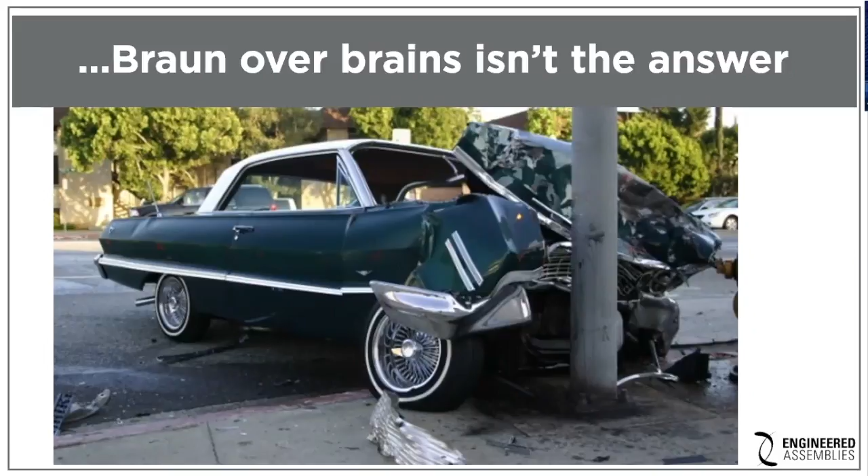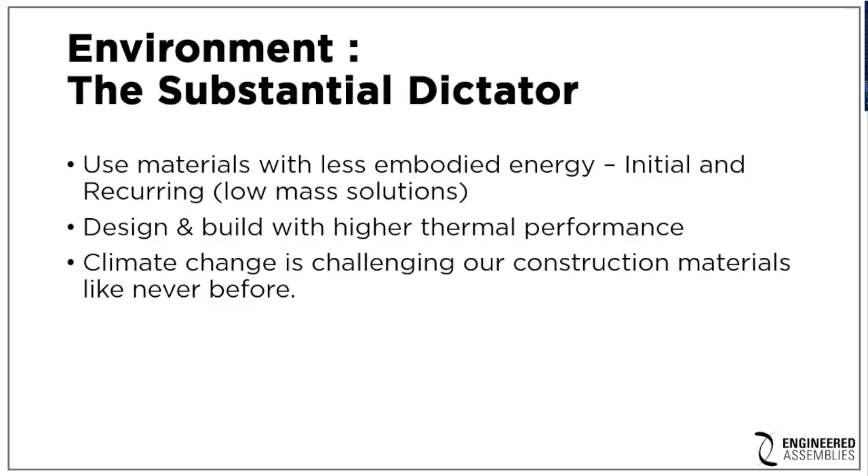Let's get started discussing a little bit about how environment is a substantial dictator. We're in an era, and have been for a while, where we're trying to use materials with less embodied energy—meaning both initial and recurring, which I'll expand on. We're trying to design and build with higher thermal performance. And climate change is challenging our construction materials like never before, which relates to what I mentioned earlier about facades being on the front lines of all the wear and tear of a building.

So embodied energy—initial and recurring. Initial is the embodied energy it takes to fabricate a material and get it on site. Recurring embodied energy is the energy it takes to maintain or replace that material if it fails prematurely. So what we have is a fairly complex issue: we're making materials lighter weight, lower mass, but we need them to last an incredibly long time. We need them to perform properly. And how do we do that?

We need to engineer the way they go on buildings better. We need to design the way they go on buildings better. And that's part of these 5 most common mistakes—not just the materials we see, the skins so to speak, but also the substructure that holds them. That has to be designed and engineered with an equal amount of thought, because the two work in unison. It's a holistic system.

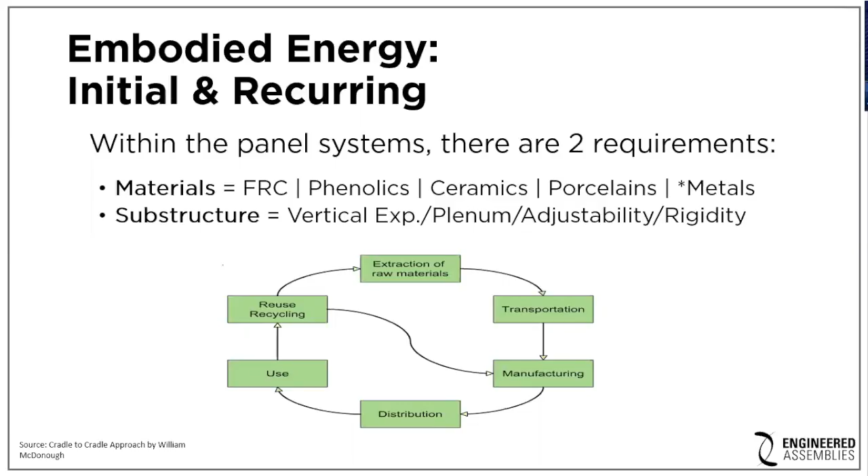The lower mass issue is going to come up again, but ultimately these materials, which are better for the environment and can be engineered properly, don't hold us back from a design standpoint. In terms of function and form—from a form standpoint, we can address historical content, we can build contemporary structures, designed in a way that follows the trends of today's design. There are no limitations there with these materials. That goes for phenolic panels, high density fiber cement, porcelain, ceramics, some particular metals. But today's 5 that we're going to be talking about is a real issue.

Now, let's be clear: the House of Design and the field of Construction have equal shares in the responsibility towards this subject.

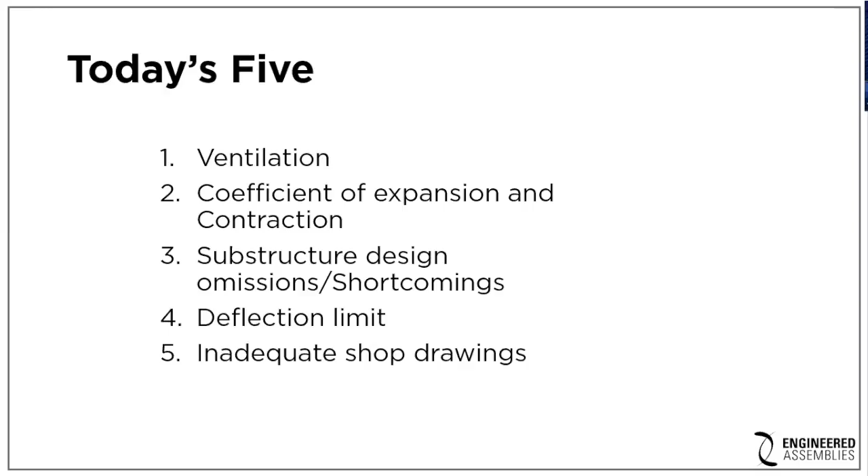Just as Engineered Assemblies has an obligation to provide clear direction towards bettering the success of these lightweight, high performance RVRS facades, we're going to examine some key areas and show the importance of how quality is potentially compromised. We'll look at ventilation, coefficient of expansion contraction, substructure design, omissions and shortcomings, deflection limit, and inadequate shop drawings, which are a good place to start discussing the 5 common mistakes.

So to begin, RVRS, what is this that we keep referring to? Well, RVRS is just an acronym that Engineered Assemblies created years ago, which simply meant rear ventilated rain screen. Now, there's probably as many definitions for rain screen as there are definitions for free range chicken, okay?

But with that in mind, when we look at this particular design, this is a design that was originally crafted and explained through DIN standard 18516. So Engineered Assemblies didn't invent this. This is something which was tried and true, proven, and works very well today. And there's nothing magic about this.

As a good rain screen system, there's a front door and a back door, okay? We're going to manage moisture with this type of system. One of the key areas, looking at the first topic of our discussion, ventilation, is having this 1-inch cavity, uninterrupted ventilation, this active plenum.

We can see in this design here that we've got a skin on the outside in red. Then we've got a vertical girt system, 25 millimeters deep, or 1 inch. That's an uninterrupted active plenum. We're going to allow ventilation to run through that. It's certainly an adequate enough chamber to allow moisture to drain through the power of gravity, but more specifically, we're going to have moisture in this system, and we need to manage that more specifically with ventilation.

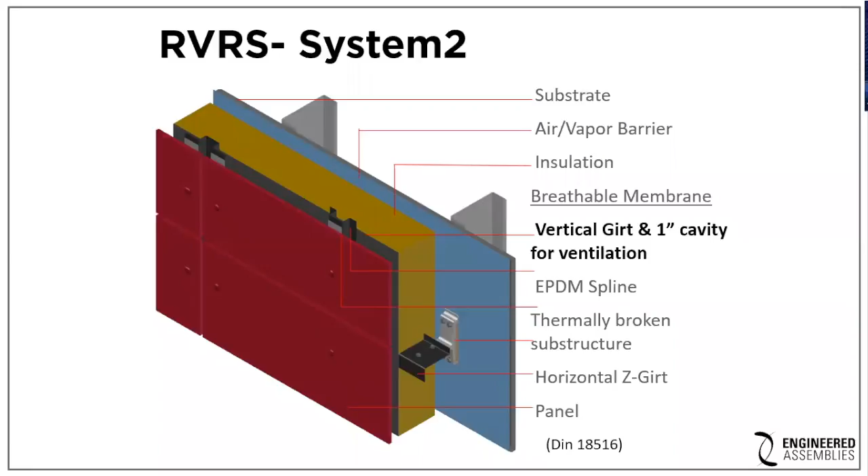It can withstand a head of water, and it's also going to give us a very clear face on the inside of that plenum, because on the outside of that plenum, meaning the skin side, we've got the back side of our facade skin. So we've got two nice smooth surfaces for air to circulate upwards, and air does move upwards. I don't believe there can be too much ventilation for the purpose of getting rid of moisture. So we need that ventilation through an uninterrupted active plenum to help ventilate.

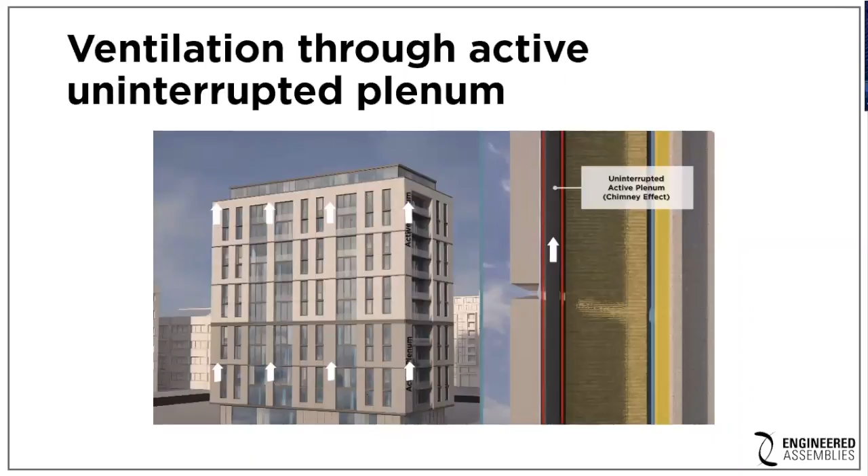And we also, amazingly enough, create a bit of a vacuum, okay? The vacuum's going to pull, as the air is moving upwards, it's going to pull anywhere it can and move moisture, maybe in the form of vapor, out of that cavity.

Now, this is an interesting point that engineering came up with and started speaking to me about this presentation, that this 25 millimeter active plenum is actually a microclimate. They were suggesting that it's not the temperature on the outside of the panel, it's not the temperature on the inside of the insulation. It's its own little climate, okay?

And what it helps to do, besides defer moisture and act as a great ventilation cavity, is it's also something which is going to balance temperature. It's going to act as an exhaust. If we've got a hot summer day and we've got solar heat gain beating down on the panel, that air inside that plenum is going to warm up. Warm air is going to rise at a quicker rate, so that plenum is going to actually speed up, okay?

And we're going to have a speedier plenum, which is going to create a greater vacuum, pulling, and we can pull moisture actually in the form of vapor through that weather membrane. So if there's any moisture within the insulation cavity that we can see here, any moisture in there whatsoever, maybe from condensation, we can actively create a vacuum to start pulling things towards there.

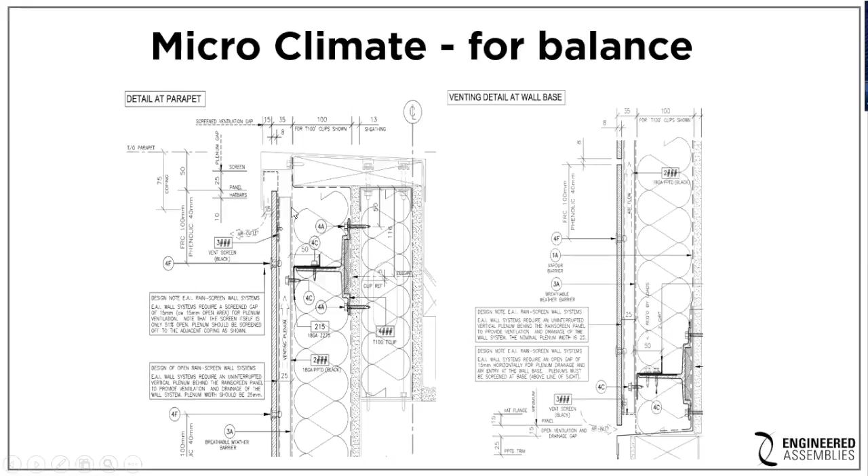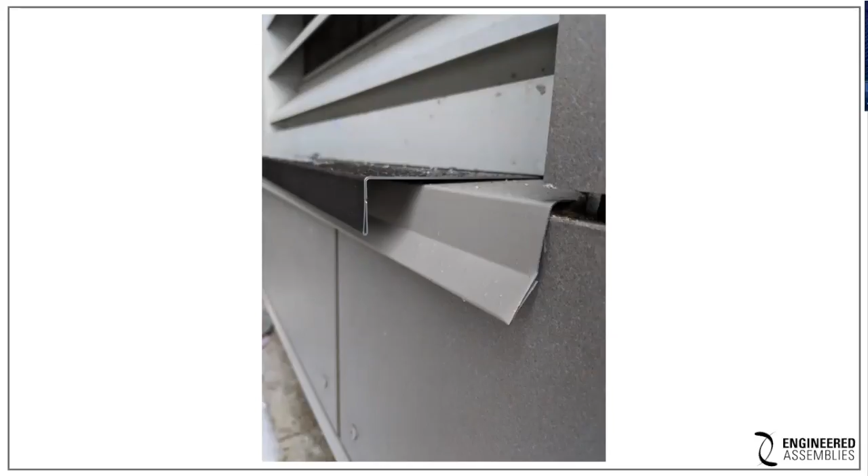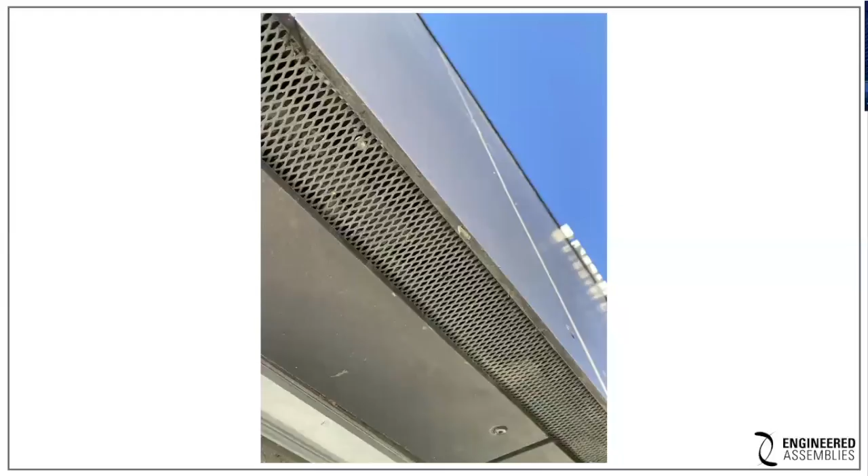As you can imagine looking at this, it's not a matter of expense. No one's saving money by trapping and stopping the plenum. Having an open plenum, and maybe installing a design with a screen like this to prevent our friends like birds or bats from making a house in that plenum, that's a great move.

But we have to ensure that when we're looking at these types of systems, that when insulation goes in - in this particular case, it's spray foam - so...

It's unique, but the same thing could happen with insulation batt that wasn't contained properly. If you had that weather membrane, it would stop the batt from falling forward. But in this particular case, they put the insulation in, and there's been overspray that came forward and blocked off that active plenum. So now we don't have proper ventilation.

When we're looking at phenolic panels or high density fiber cement, we're definitely going to see the results of that, and it's not going to be pretty. Those panels require good ventilation, and it's something they deserve. It's neglectful to either not design this in properly or not take this into consideration when installations are done. So sloppy workmanship, okay?

So that's really the first principle, and it's probably one of the biggest ones. Ventilation is key, and we see these accidents happening on site.

Now, when we get into chapter 2, we start talking about dynamics of facades. We're looking at, exactly as the slide suggests, how panels react with each other and move with respect to their fastening system. Okay, so buildings are live, that's the way we build in North America.

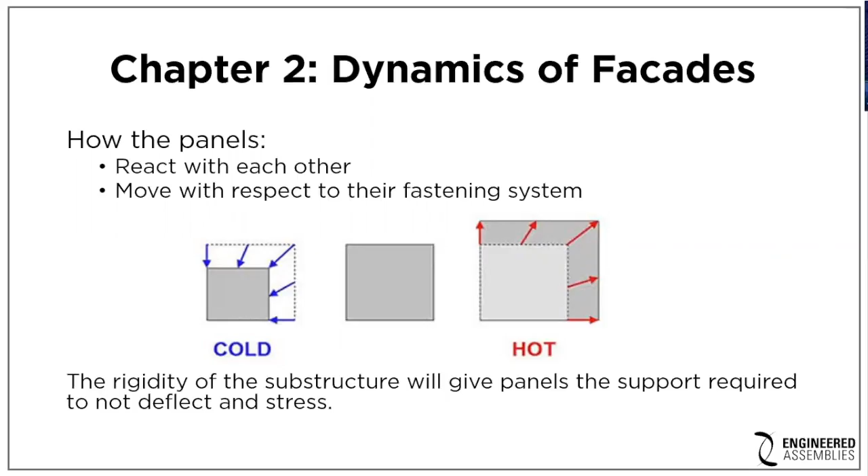Buildings are live, they're dynamic, they move. Floor slabs move. We have steel stud construction with concrete slabs - not everything is a shear wall. So substructures expand and contract, panels expand and contract, and with that in mind we need to ensure these things are being taken into consideration.

So with lightweight materials, low mass materials, they're going to expand and contract more than heavier weight, heavier mass materials, traditionally. That may not be the case for every single material, but by and large that's the rule. So while we're trying to use these lightweight, low mass materials to lower our footprint and do the better thing for the environment, we need to make sure we're addressing the needs of these things.

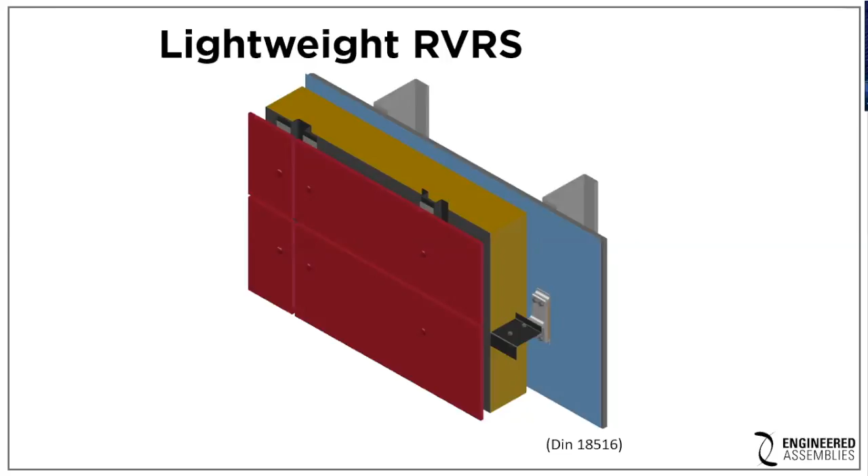Because they can work very well, and they work very well by doing things just like this, by putting in what we call fixed and floating points. So when panels are fastened to a substructure, we make sure there is a fixed point to locate a particular panel, and floating points. This can go for ACM, this can go for a variety of materials that have any coefficient of expansion and contraction. This kind of thing must be respected, and it's not always respected.

Whenever we see failures of panels, and we've gone across the country, and in some cases at the request of even some of our system partners or competitors who've asked us to take a look and see why this is happening, it's usually ventilation or fixed and floating points. It's primarily one of the two.

Panels are not allowed to move. Substructures are not allowed to move properly because our buildings are alive, our materials are alive, or they're not getting enough ventilation. We have extremes of temperature in Canada, and certainly here in Ontario, we see crazy jumps over and above the freeze-thaw line.

That's going to contribute significantly to expansion and contraction, but also the freeze-thaw line presents unique challenges for materials. If there's moisture absorption and then freezing, things can expand when frozen if they've absorbed moisture, so we need to consider that.

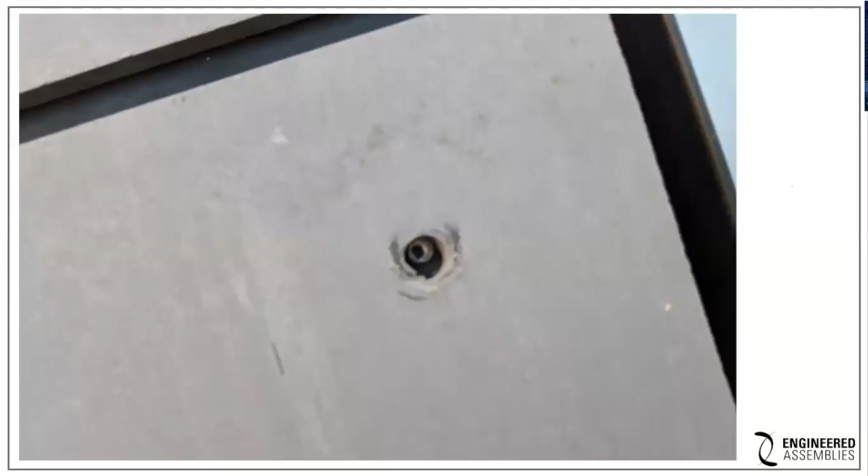So when we look at a picture like this, we see a fastener in an over-drilled hole, which we should be doing. We put in oversized holes with rivets or fasteners for our floating points, so there's float between the fastener and the panel, and the panel can move around.

Some panels have a coefficient of expansion and contraction as much as 1 millimeter per meter. And we're talking about 4 meter long panels, so 4 millimeters - things can move, okay?

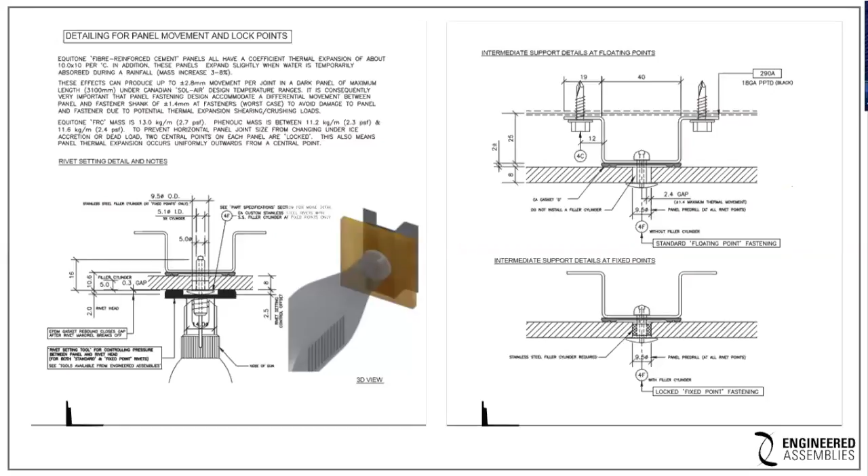We need to ensure that fasteners are being put in the center of holes, not on the edge of a hole, because this is a classic case that I saw at a project recently where they complained about panels cracking, where fasteners were not centered.

So when this panel, when the substructure starts heading north, or the panel starts contracting, what's it going to do? It's going to provide strain right at that point, and that is where it's going to crack. We see this in some cases where people neglect to put in their fixed and floating points on panels, and we see panel failure.

In phenolic core panels, we might not see cracking, but we can see buckling, and it's just not necessary if we just follow the simple rules. Within the Engineered Assemblies Design Guide, we present this very clearly, so it's a very simple system to follow.

Now, using rivets as opposed to thread fasteners is traditionally a more successful route, specifically because with threaded fasteners, there's the issue of fastener tension, and that is going to be regulated by and large by the person installing it. So that becomes a very subjective point.

Whereas when you're using a rivet system, especially by the model that we show within our design guide, all the fasteners, all the rivets get installed at the same tension, uniform. They're not over-compressing the panel, not creating additional fixed points.

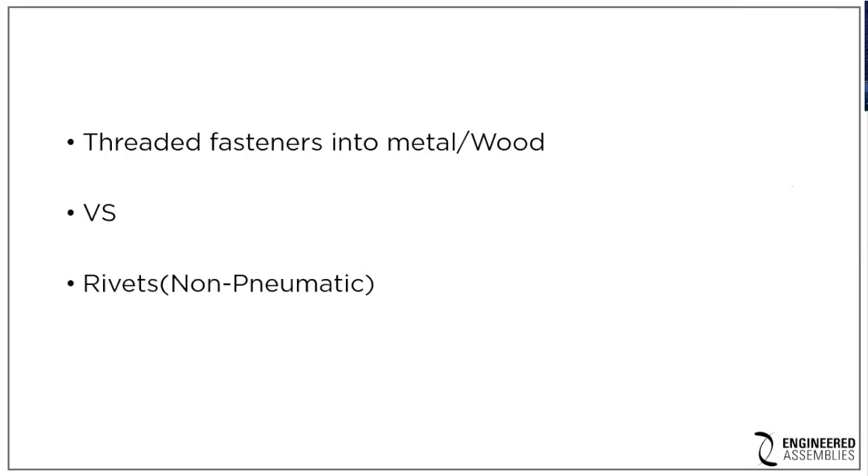And they're all centered within their holes. So if it's meant to be a floating point, it's going to stay a floating point because we're not using a self-drilling threaded fastener going in on an angle or hugging the outside edge of a hole, just like we see here. So fixed and floating points, coefficient of expansion contraction.

Recognizing this is a key point in the success of facades. And again, this is not something that adds cost to a project, but doing this properly is going to allow facade skins to do the job they're supposed to do and last as long as they're supposed to last, not intruding on their secondary embodied energy responsibility.

So in a panel like this, we would have maybe 2 fixed points on this size of a panel. It could be 1 fixed point when it comes to phenolics, and all the rest are floaters. So that substructure can move a little bit, expand and contract, because we typically use galvanized steel systems. Some are aluminum, but our panels are allowed to expand and contract as well.

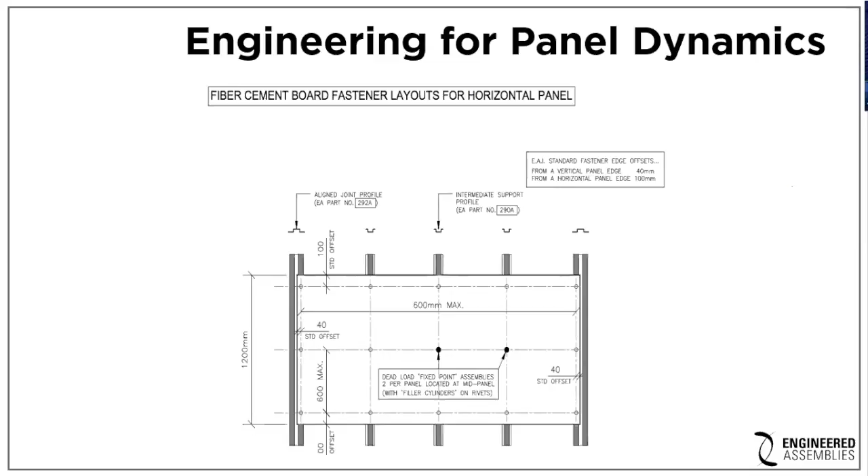If we follow this rule, then we can create very sophisticated designs like this, and they last decades and decades and decades, 50, 60 years. In some cases with some of these materials, could be 100 years. But we can do the edgy design that we want to do and know that from a functional standpoint, the function's going to stand behind the form, and be successful.

So leaping into substructure design, this is a critical point because this sits hand in hand with panels and the coefficient of expansion contraction. Substructures are equally as important - the design of them and the implementation of them in terms of installation. When we're looking at that, we need to respect traditional points of deflection and movement on a superstructure.

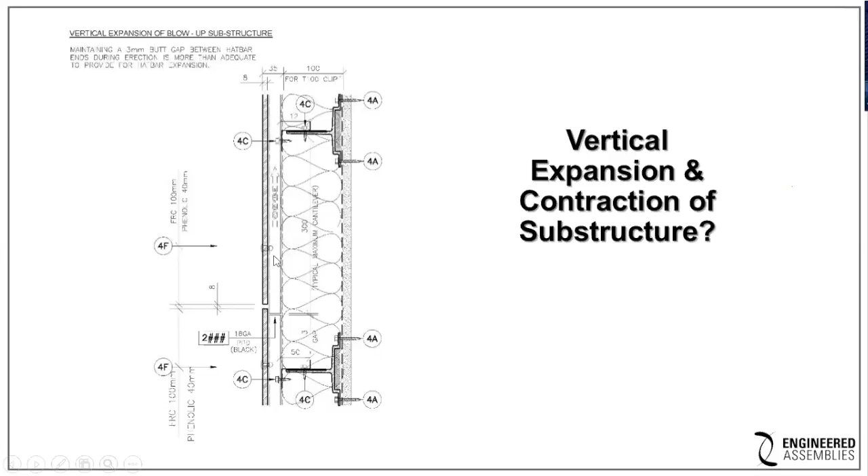If we're looking at the RVRS design or a vertical member supporting a panel, we obviously have to respect slab edges because slab edges deflect. So when we have a slab edge deflecting, that means we have to start and stop every vertical member, so our substructure for our system has to start and stop.

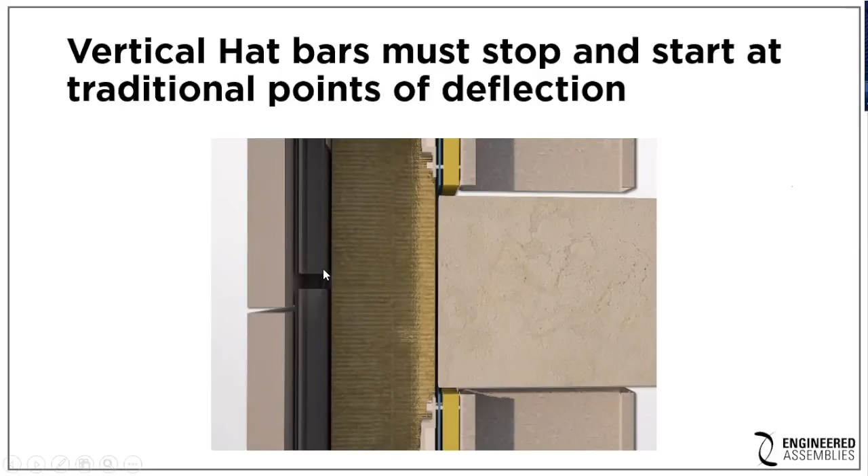Now, I've been doing this for a while, and these are typically not elements included within architectural drawings. In some cases they are, but typically not. These are elements included in things like the Engineered Assemblies Design Guide, where we talk about members, substructures that are respecting the dynamics of the superstructure and how they should behave, and how we compensate for that behavior. So we have the vertical members starting and stopping at these slab edges.

And the same thing goes when we have a substructure starting and stopping and there's a gap, there could be movement there. We can't have a panel fastening over top of a gap in the substructure. So at a traditional point of deflection, we can't have hat bars, for example, just being sistered, running in 25-foot lengths. This definitely benefits installation costs - if people can show up with 25-foot long hat bars and just sister them and run them up the building, that's a cost-saving measure over having custom-made or custom length hat bars put at critical points to make sure we're not overlapping traditional points of deflection.

This takes a little bit more care, a little more attention in terms of design and installation, respecting this. This is the kind of thing which shows up in great shop drawings - we're going to get to that point of shop drawings being critical. But this is a big thing because...

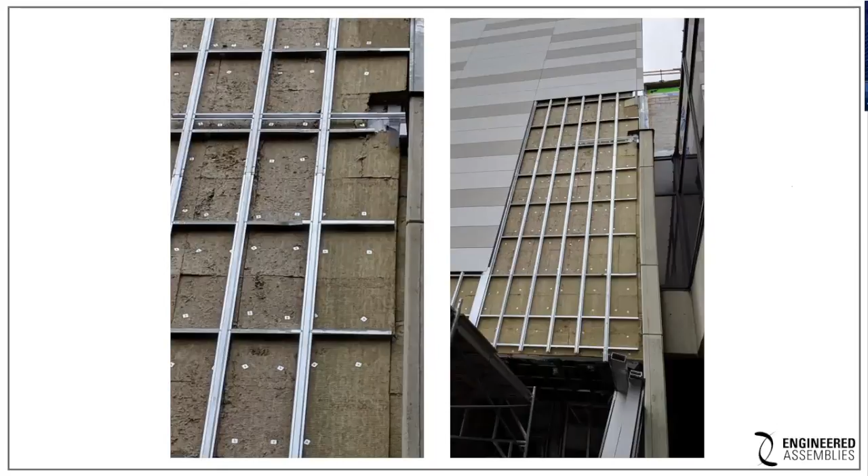We typically use substructures built out of 18 gauge material. We can't build a cage of 18 gauge material around a superstructure built with concrete slabs expected to hold steady. When the superstructure starts to move, and it will, through control joints or simply natural traditional deflection, it will tear that cage apart. And when it tears that cage apart, it's going to tear the facade skin materials apart. So we have to design accordingly and have substructures respecting traditional points of deflection, respecting the live nature of the superstructure, and designed to meet the needs of the material in terms of their natural coefficients of expansion and contraction.

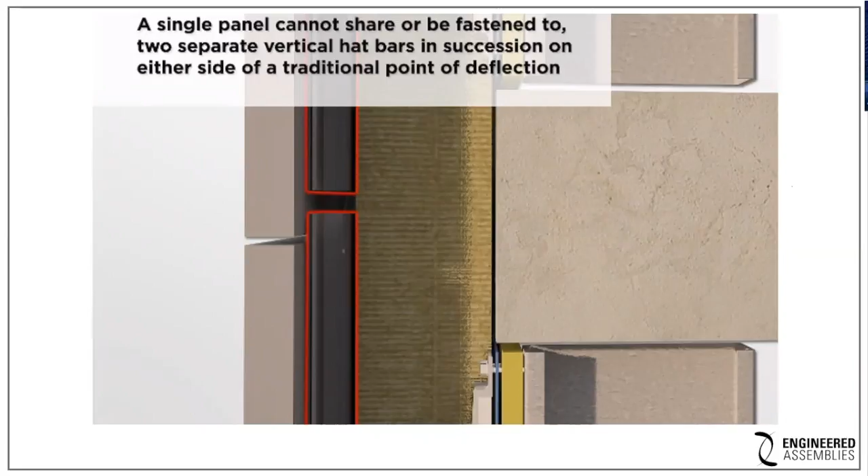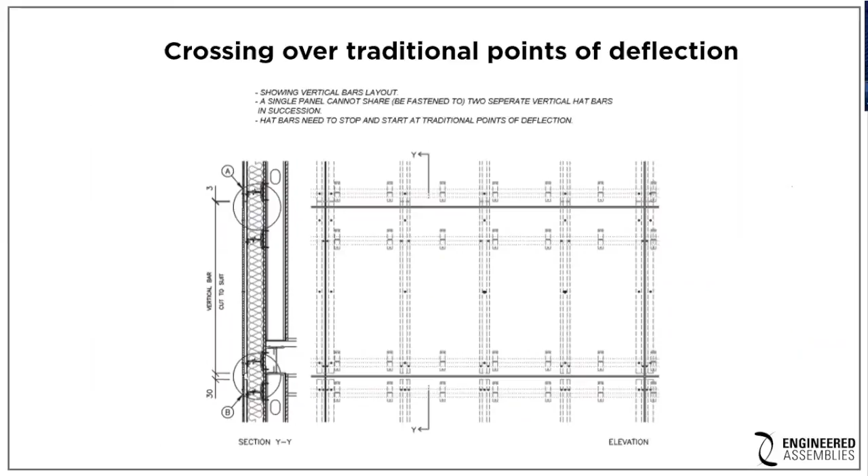So we're not going to cross over traditional points of deflection, and we're certainly not going to take a material and fasten it over top of a gap that exists within a substructure. We're going to stop it and start it.

And this is a perfect example - this is a great building, 60 Richmond, done by Teeple Architects a long time ago. It was one of the first projects done by Engineered Assemblies. On this project, at every slab edge, there is a seam in the material. Now, I've heard some architects from time to time say, I don't want a consistent horizontal line running across my building. Well, amazingly enough, no one has ever brought that up when looking at this building.

And this is a great example of a horizontal seam at every slab edge, respecting the material and substructure. This building doesn't miss a beat. It won a design award, a Canadian Architecture Design Award a few years ago. It's a fantastic looking building designed in a manner that addresses all the issues we're talking about today, that need to be addressed properly so it doesn't fall into one of the common mistakes.

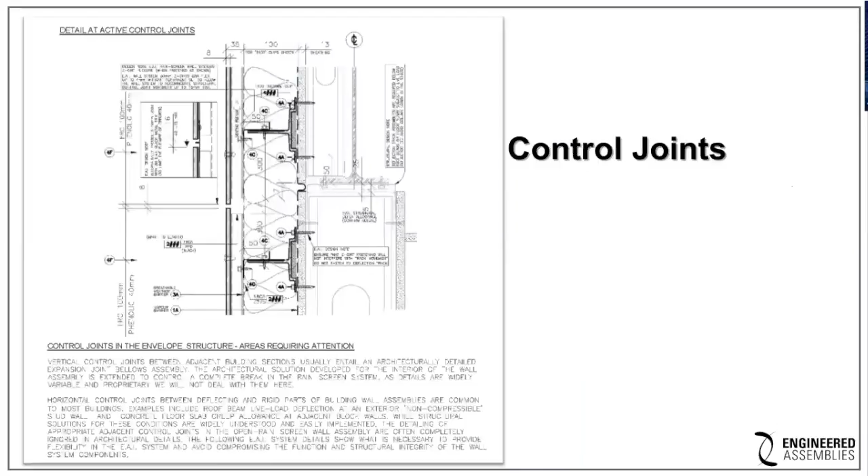So control joints, I think we've spoken about this. With that in mind, we talked about ventilation being key, the dynamics of facade skins, and substructures. Now we're going to talk about deflection of the superstructure, of the substructure itself: L over 300. This is a big point - having a substructure that's rigid enough in the through plane direction is never going to harm a material.

Now, different materials can withstand different amounts of deflection in their substructure. For most lightweight, low mass materials, they're not going to withstand a whole lot of deflection or flexing. Their elasticity is great in some respects, relatively, but if we have a solid substructure with a good deflection limit, like L over 300, we can rest assured we're providing a good, solid backbone, or rather foundation, for these panels so as not to deflect too much.

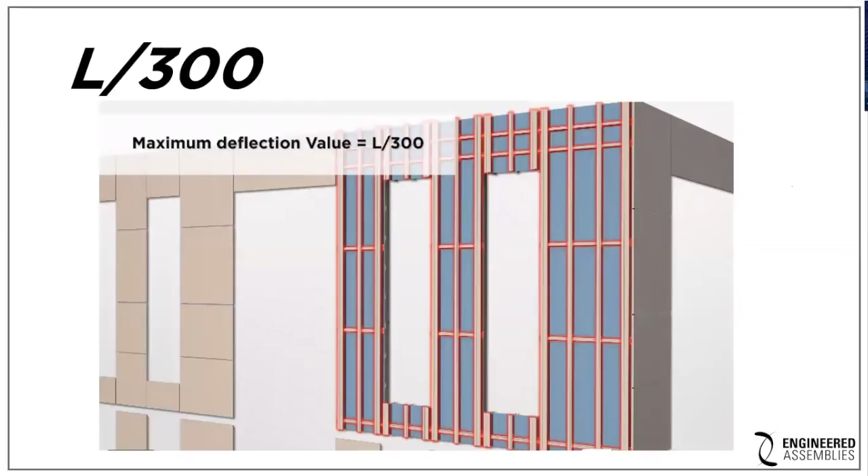This is going to contribute significantly. This means that when buildings and facades are being designed at the design level, we're designing with proper substructure systems, like omega channels, or a hat bar as we call it. When we look at an omega channel, it has significantly more strength in the through plane than a Z bar, and this is a nominal point of expense when designing and building a substructure.

After design from the architectural and engineering end, when it falls into the lap of the subtrade doing the facade installation, they're responsible for their shop drawings and engineering. They have to make sure, and we have to make sure, that poor design materials are not being implemented, and that we're using the best thing we can to provide L over 300 in terms of a deflection limit. That's going to contribute immensely to the survival of these facade skins, so they can have a great life and contribute to our battle against slow deterioration of the environment. We just need to use our heads, with that brains over brawn type of mentality.

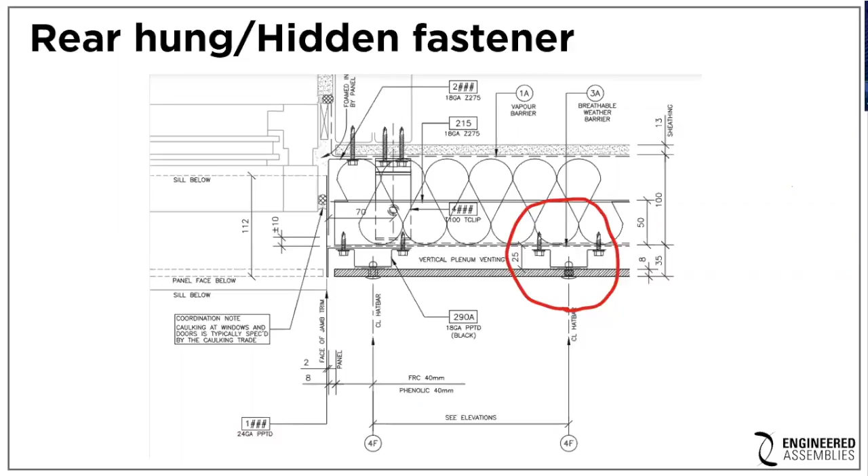It's an interesting point, because there used to be a time when we used to put on drawings, 'make good.' Granted, this might have been 50, 60 years ago, and it was an expression that simply meant build this in the right manner. There was a time when people didn't need that explained to them - they knew what was the right way to do things.

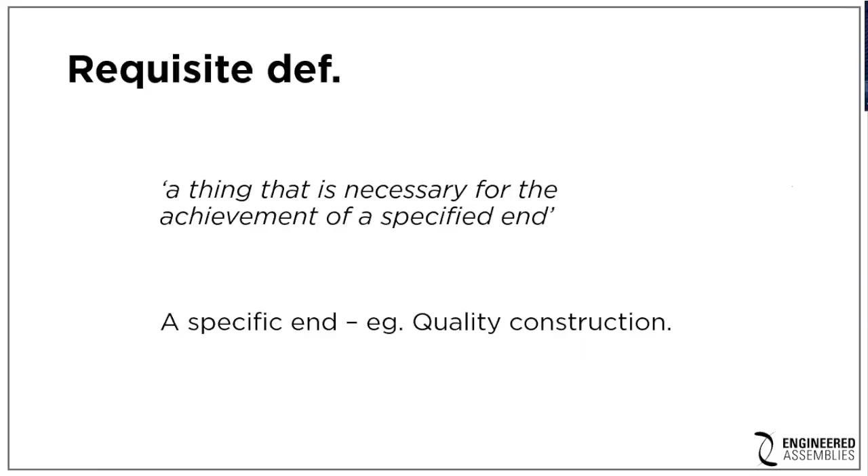We often refer to something like due diligence - everybody's familiar with that term - placing an obligation on people to complete work with care and requisite effort. When we look at requisite, it's a thing that is necessary for the achievement of a specified end, and that specific end we're talking about is quality construction. So if we go into this with the mindset that we're going to do the right thing, and not design poorly or take shortcuts in terms of installation, then that's going to be as good as the make good component we used to see generations ago.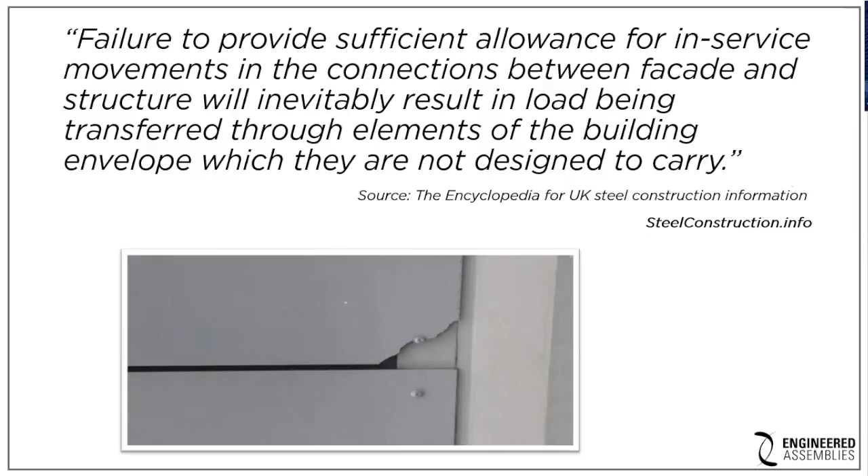This is something that Engineered Assemblies has thought a lot about, hence why we're bringing out an announcement on a new system I'm going to talk about. But as I say, if we have failure to provide these basic elements, and we fall into these 5 common mistakes, then definitely we're going to see costly and unnecessary tragedies in terms of our facades.

This is a perfect example of some of the stuff I saw at a project recently. The subtrade will remain nameless, but this was a condition just above a low roof on a building - there was no access to getting onto this low roof for all intents and purposes. What the subtrade had done with some of these panels - high density fiber cement panels, or they could be phenolic - is they'd chosen certain panels and just not fastened the bottom of them, because from the ground over top of this low roof, you can't see the bottom of these panels.

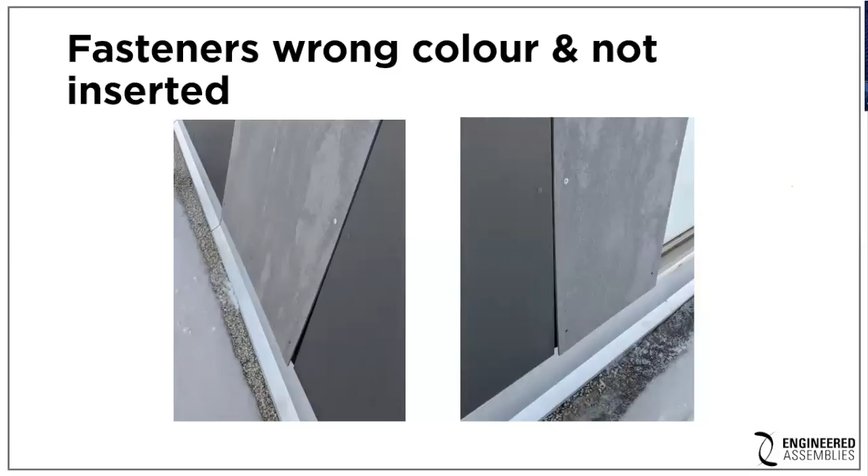So they just ran along the front face of the building, not fastening these panels. I can't imagine what this saved in terms of cost - we're talking about maybe 1 minute per panel to fasten these things in. But this is the kind of carelessness we're seeing in some respects - this is common negligence, common mistakes happening in the facade industry. This is irresponsibility. In this case, fasteners were the wrong color because from the ground you couldn't see that, and they simply neglected to fasten the bottom of the panel. This is like the nth degree of negligence.

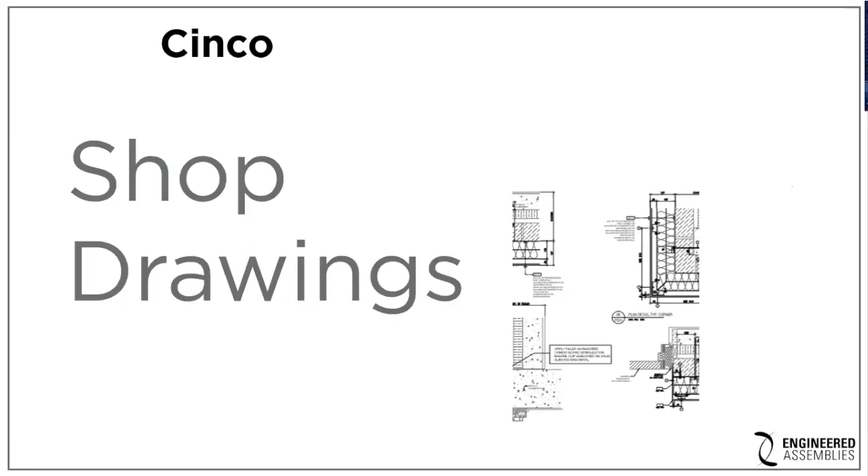Now, getting into our last point here, shop drawings - this is our 5th and final component of the 5 most common mistakes. I consider not providing adequate shop drawings a common mistake. Great shop drawings save time and save money. They are not cheap - they have a value to them - but regardless of their cost, the value in terms of the project is exponential, because great shop drawings are a great example to the installation crews on exactly what has to be done for this specific building with these specific materials.

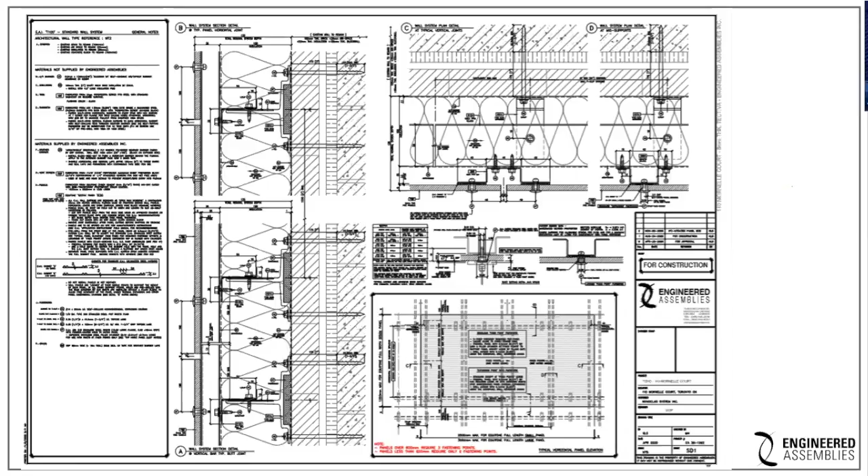Meaning we're not just cutting and pasting common details from a manufacturer's website. We're referring specifically to this building at hand, showing every single panel of lightweight, low mass facade systems going on the building, and the location of every single hat bar and the distance between them.

When you have great shop drawings, there's very little room for error. I can say without a doubt, no architect or engineer would say we don't need great shop drawings. We need great instructions—no one likes to assemble something without proper instructions, especially when designing and erecting buildings that need to last decades in a very challenging time with climate change. Things need to be done properly, so having excellent shop drawings is not a compromise.

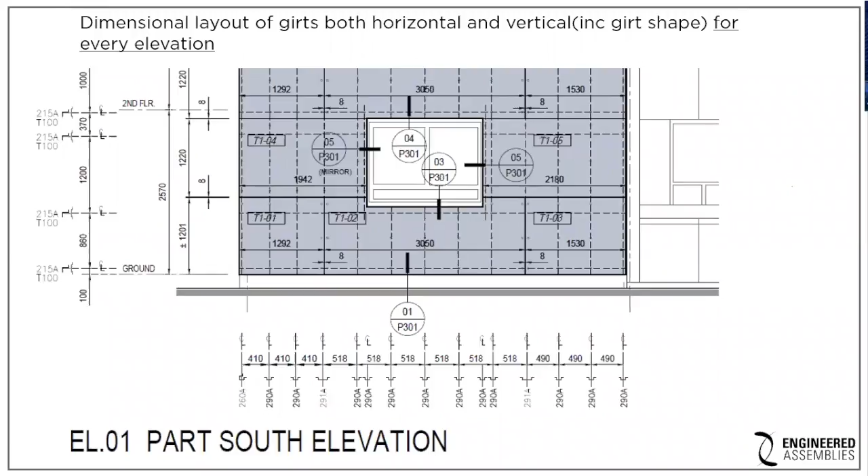These kinds of things have to be done. Specific details showing specific conditions for the very building being built and its materials are critical. When we see poor shop drawings, we usually feel fairly safe there's going to be issues on a project. Not always, but great shop drawings usually don't leave much room for error.

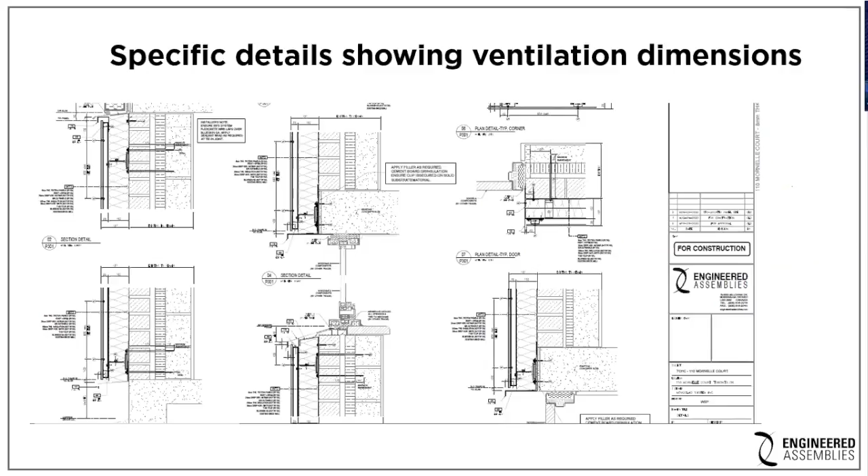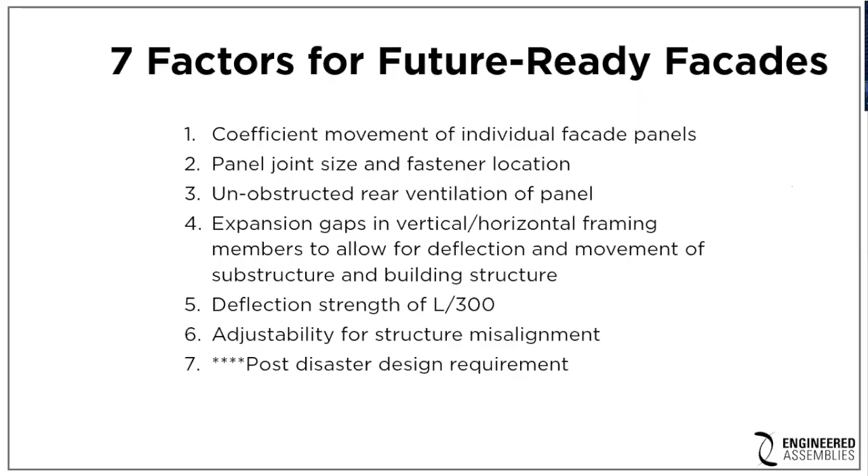That pretty much wraps up the 5 most common mistakes we see. There's certainly more, but when designing and building great facade systems, we've got these 7 factors for future-ready facades: coefficient of movement of individual facade panels, joint size and fastener location, unobstructed rear ventilation, expansion gaps in vertical and horizontal framing for deflection, natural deflection of a building at L over 300, adjustability of the substructure for misalignment of the subwall, and the potential to apply this all for post-disaster design requirements. If we can get these things together, we usually have a lot of success.

We've created the series in hopes it'll become an industry standard. It's a means of offering a superior program of delivery, ensuring these system installations are conducted properly and that the facade manufacturer's warranty requirements will be met. This is accomplished by uniting everybody with a common methodology and software platform.

It's critical that people understand—I think a lot of people know this in the back of their minds, but having been in the industry for over a decade, most manufacturers' warranties are only valid when materials are installed as per the manufacturer's recommendations. This system came about as a means of providing a certification program that ensures materials are installed properly, but maybe more importantly for some, validating manufacturers' warranties. There are manufacturers who issue warranties, and clients who believe that when they receive this piece of paper—say, a 10-year warranty—they actually have one, when in fact, because the system wasn't installed properly, they have nothing. This is all too common in the industry.

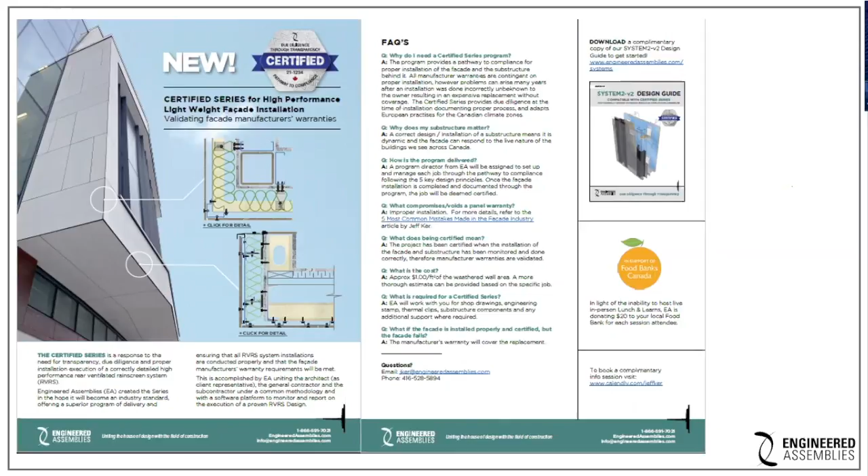How we plan to discuss the ins and outs of the Certified Series is—well, if I spelled Engineered Assemblies correctly, that would be a good start.

If people go to calendly.com/jeffker, we'll be offering information sessions. You'll be able to choose dates and particular times, and it'll be similar to a short lunch and learn type presentation. We're doing this so people can speak about particular projects in private on a firm by firm basis and see if there's a synergy there for the certified series and their project.

With that in mind, if a particular firm jumps into this and wants a presentation, for every person who attends Engineered Assemblies, in lieu of the cost of providing lunch, we're going to donate $20 per head to the local food bank for that firm. So this is how people can learn more about the certified series, by jumping into calendly.com and booking a presentation within the calendar.

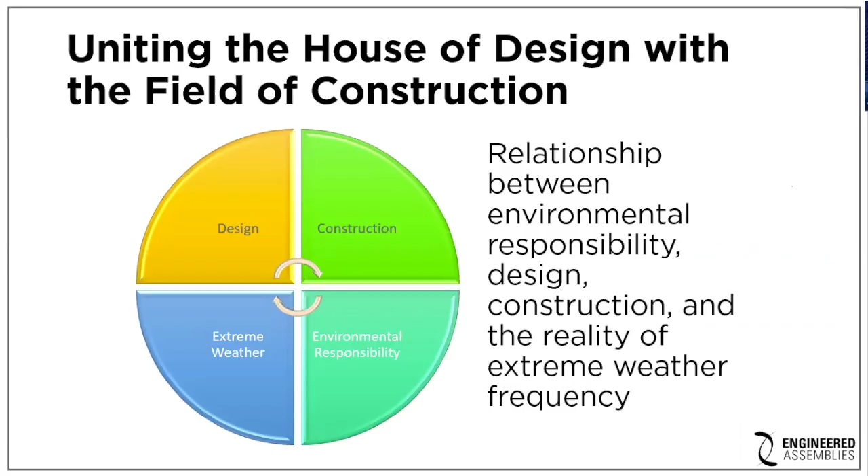So with that in mind, we covered some of the 5 most common mistakes within the facade industry. We talked about responsibility and due diligence, and a means by which Engineered Assemblies is trying to harness this issue and get it under control by offering the certified series. We continue to attempt to unite the house of design with the field of construction. We've got a relationship between all parties within this industry and the environment to do the right thing. We continue to do that, and it will provide good rewards for us.